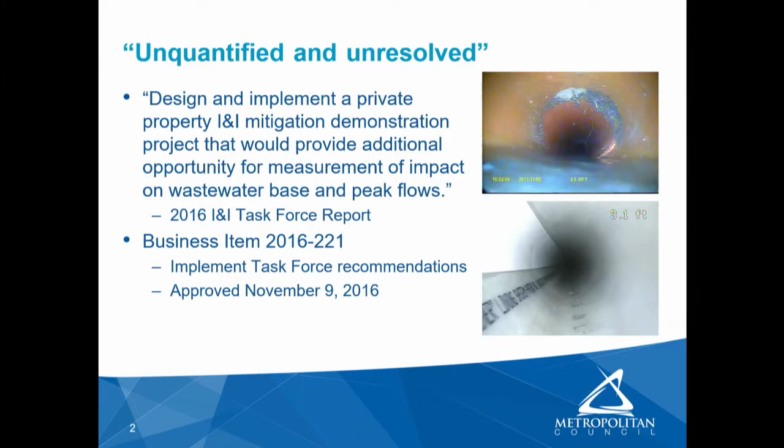So in 2016, the task force report was approved by the council. It included 8 recommendations, and one of those recommendations was for the MCES to design and implement a private property I&I mitigation demonstration project that would provide additional opportunity for measurement of impact on wastewater base and peak flows. And so here today is our proposed demonstration project. I'll turn it over to Marcus. Thank you, Kyle.

As Kyle said, we've been working on this for a while. I think we came here back in 2016, and in January, Janine and I did an information item to the effect that we were going to be working on this as well. And again, this grant is to support funding of a project that demonstrates a reproducible approach to address I&I, which adds to the current knowledge base that working on I&I is good for the sustainability of the system. So the goals themselves are really at the high level.

We're looking to demonstrate the effectiveness of the techniques used for I&I mitigation. Generally, we know it's close the sources of I&I, more or less, but we want to prove locally that it works, have a local project to work from, and it's something that the task force asked us to do. And one of the major drivers of this is that other regional communities would be able to use this demonstration project, take the results, and use that in their own system, adding to the value of those dollars throughout the communities.

What we would ideally look for is something like this. For any given rain amount, you see before and after how much gets into the wastewater system. So to do that, typically a community would identify their sources of I&I. They would start monitoring the flows. They do some work, monitor again, evaluate, and this takes a couple of years to do. And so this kind of study we're planning to go through around the end of 2021. So whichever community is selected would have 3 years to do so.

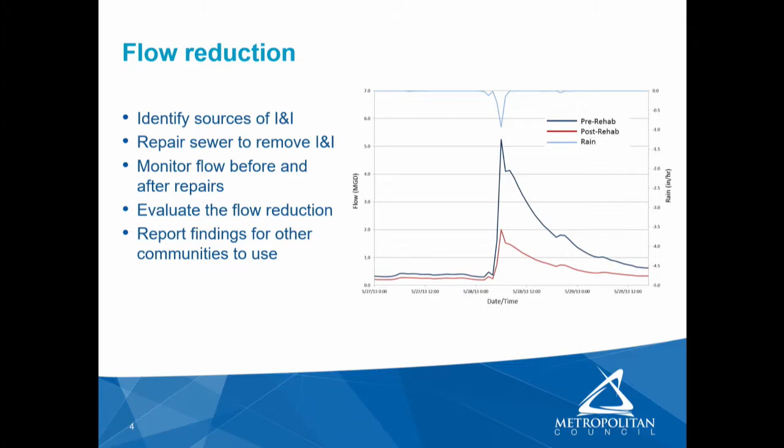And this is one of 2 things that we still have to do from that meeting in January when we had an information item. So basically this and studying the effects of the I&I program are the 2 open items we're still working on. The selection criteria, we went over quite a bit. We wanted to be as objective as we could. We're selecting a community for this. We wanted to make it available to as many communities as possible.

So what's most important is that the proposals that come in, we're going to be looking at them for quality and value. How well is it going to work, and how could this project benefit the other regional communities? On top of that, the ability to complete on schedule. Again, this takes a lot of time for a community to take on. And so 15% of the points are basically saying, can you complete this in 3 years? Do you have the staff and the time and resources to do that?

If you did have a couple of communities that both had 80 out of the 100 points available, there would also be the effectiveness. We know that there's a performance indicator of the age of housing. Housing stock that's older than around 1970 typically has higher rates of I&I. So we've made a priority towards older housing stock. And finally, with financial need, if communities are doing the work in an area of their community that's below their median home value, then we prioritize that as well. So those points are available to all communities. It just comes down to who proposes the best project to get the work done.

What this would include is the flow monitoring itself, the sewer repairs, evaluation, and the reporting over a couple of years. And the guidelines state that at least 50% of the project cost has to be covered by the community. Our estimate is that a project like this would cost over $1 million, and so the grant funding is for $500,000 to one community to do the project.

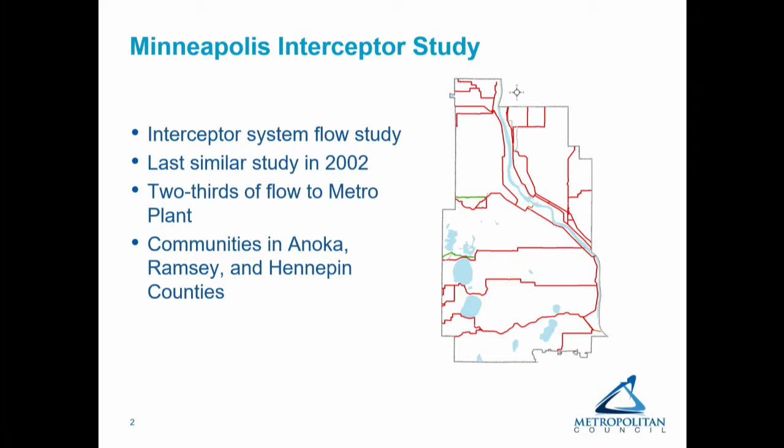All right, thank you. Probably could have put this slide up before. Sorry about that. So as Kyle mentioned, this is an image of our interceptors that are inside the bounds of the city of Minneapolis, reaching out to those 21 communities. The goals of the study, in the big picture, we're looking to reduce the risk of sewer overflow, reducing the potential for it to go to public waters and the risk of it backing up into a building. And we're doing this to increase the reliability of the system. Again, this is the part of the system that quite a bit of flow comes through, and that all goes through St. Paul to the Metro plant.

So the study goals are to identify those areas of high inflow and infiltration. You can kind of hear a theme with the presentations today. And then identify areas with limited sewer capacity. And by doing that, we'll be able to develop some strategies to lower the risk of sewer overflows. Evaluating the alternatives through this study and prioritizing future investments will allow us to make informed decisions and hopefully save quite a few dollars over the period of time that we're talking about.

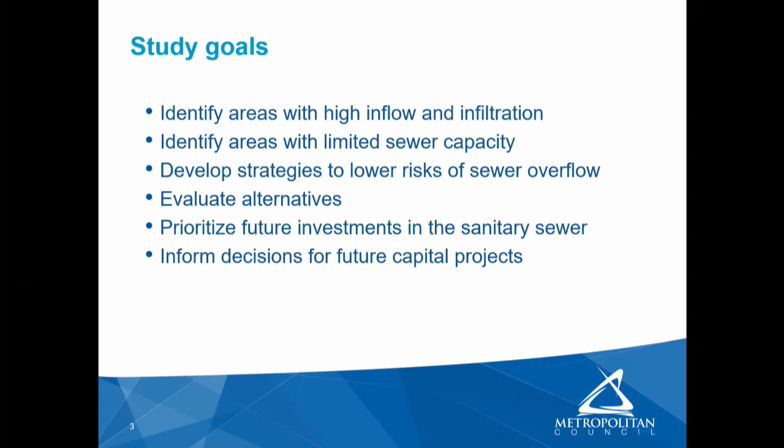I believe that we're looking to project out to around 2050 with sewer flows with this study. In the Thrive lens, the public financial resources will be invested efficiently and effectively to maintain conveyance assets, which protect the region's natural resources. From the side of stewardship and sustainability, I think it's really important that a quantitative analysis of the flow conditions and how the critical interceptors allow for responsive planning to preserve capacity in the region, allow for future growth, and in the long term, just make a more reliable system that we've quantitatively looked at.

We did receive 4 responsive bids, all of which met the MCUB goal commitment, and the selected vendor, based on the evaluation panel led by procurement, offered the highest value proposal for this study. So the proposed action today is that the Metropolitan Council authorize the regional administrator to award and execute the contract for the Minneapolis Interceptor Study, project number 807650, contract 18P047, with HDR Engineering Incorporated in an amount not to exceed $6 million over a 5-year period. And with that, I'll take any questions.

Questions? So remember, Wulff, this is where I thought you were on the agenda when you came in here. I know. We weren't that fast.

So I do have a question. Councilmember Melander. So we had 4 bids. This group was at the lowest? This, I believe, was in the middle, actually. It was based on the value, both the quality and responsiveness of the bid, and then based on what we would get out of the value of the dollars for that. Are you at liberty to say who the other 3 engineering groups are? That's a good question. I'm going to look at Kyle and Janine on that one. I would need to check on that, and could get back with you. Well, that's fine. I'd be curious. Go ahead.

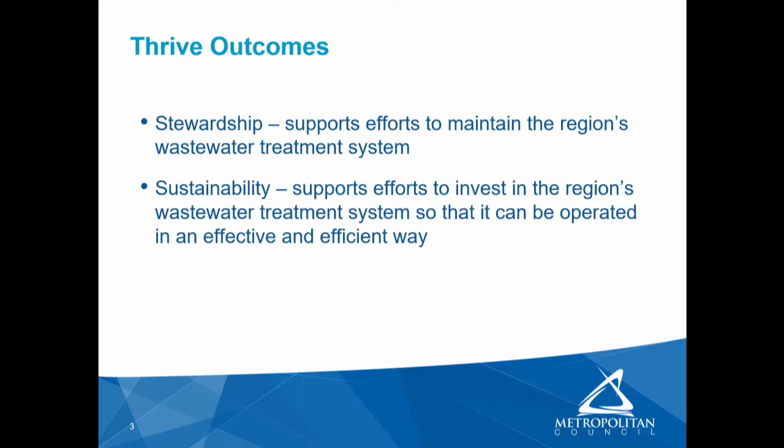This work supports the Thrive outcomes of stewardship and sustainability. The Metro plant needs additional solids treatment capacity to preserve existing wastewater treatment plant infrastructure and to serve regional population growth. By the time the project is constructed, the existing incinerators will be 20 years old. They will need to be taken out of service one at a time for periods of up to 6 to 12 months. We need additional capacity to ride through those periods of renewal.

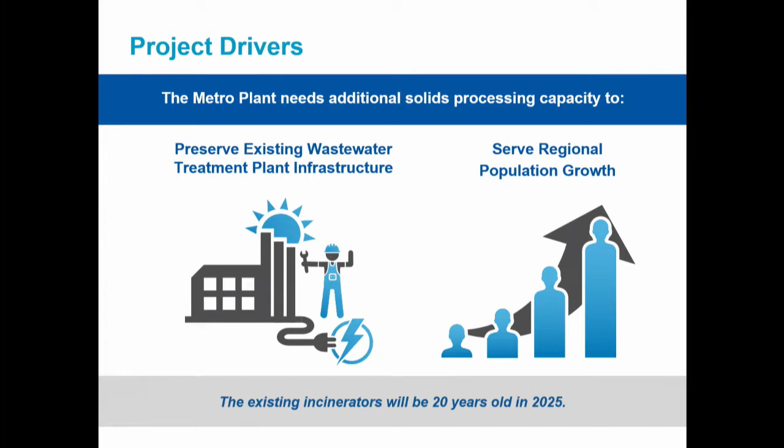The Metro plant service area is anticipated to grow at a rate of approximately 500,000 residents in 30 years. The planning period for this facility plan is through the year 2050. We evaluated a wide range of alternatives against multiple factors, focusing on economic considerations, air quality, energy recovery, and hauling impact. The original list of alternatives was narrowed down to the 4 alternatives shown here, which are the most cost-effective and maximize the life of the existing incinerators. The first alternative adds a 4th incinerator.

The second alternative adds digester facilities to digest a portion of the solids, followed by incineration in the existing incineration units. The third alternative adds dryer facilities for the production of a biosolids product that can be sold as a fertilizer. This is similar to what we do at our Blue Lake plant. The fourth alternative adds digester and land application facilities for the production of biosolids that can be used as a soil amendment. This is similar to what we do at our Empire wastewater treatment plant.

Due to the size of the Metro plant, adding a 4th incinerator costs 50% less than the lowest cost digestion alternative to construct, operate, and maintain. The fourth incinerator also provides for continuity with existing facility operating requirements, and it maximizes our investment in the existing incinerators.

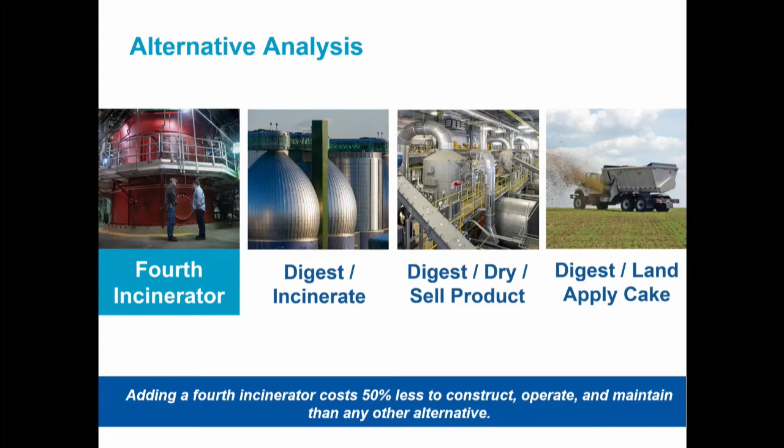Our evaluation included the sustainability components listed here, comparisons for air emissions, energy recovery, greenhouse gas emissions, and reuse potential. The fourth incinerator has the lowest air emissions of any alternative. The fourth incinerator also has excellent energy recovery capabilities. All alternatives have comparable greenhouse gas emissions, and this is because greenhouse gas emissions from wastewater treatment plants really aren't a factor in the Twin Cities area. All alternatives have comparable nutrient recovery in terms of phosphorus.

The Metro plant ash is high in phosphorus and micronutrients. It has potential for beneficial reuse as a phosphorus fertilizer. MCES is currently exploring this use with the University of Minnesota. The University of Minnesota is conducting a 3-year crop study. We are 2 years into that study, and the results look very promising.

The recommended plan is to construct a fourth incinerator, followed by renewal of existing incineration facilities. The total estimated project cost is $180 million. This is the concept drawing showing the new incinerator in a small 22,000 square foot building extension of the existing solids management building at Metro. The addition is a bump out that parallels the existing 3 incinerators.

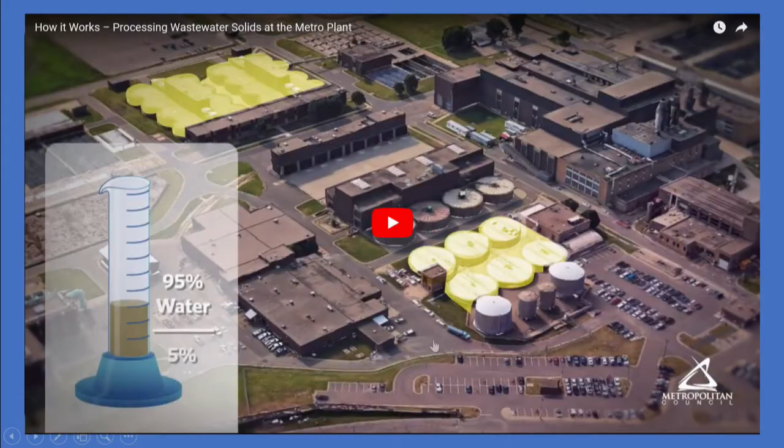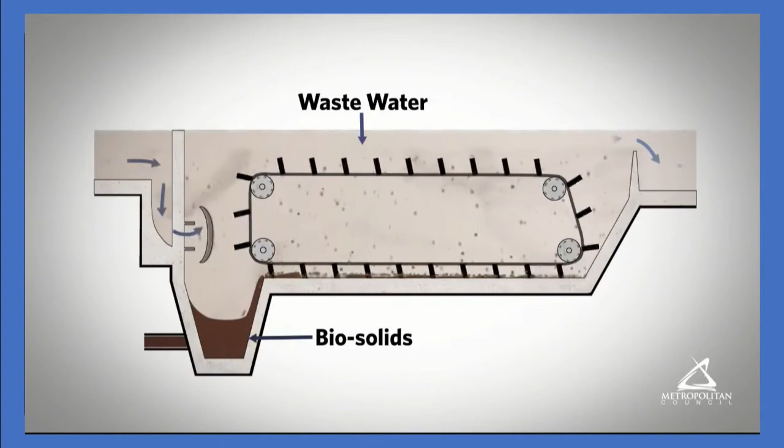Wastewater treatment produces sludge, also known as biosolids, that treatment plants must process separately. Biosolids are a renewable, carbon-based fuel source that burns similar to wood or coal. Challenges we face in treating biosolids include: 1. Removing liquids to reduce volume. This makes handling easier and more efficient. 2. Stabilization to remove disease-causing bacteria. This is done using heat. And 3. Recovering energy to generate heat and electricity. This greatly reduces our plant's energy costs.

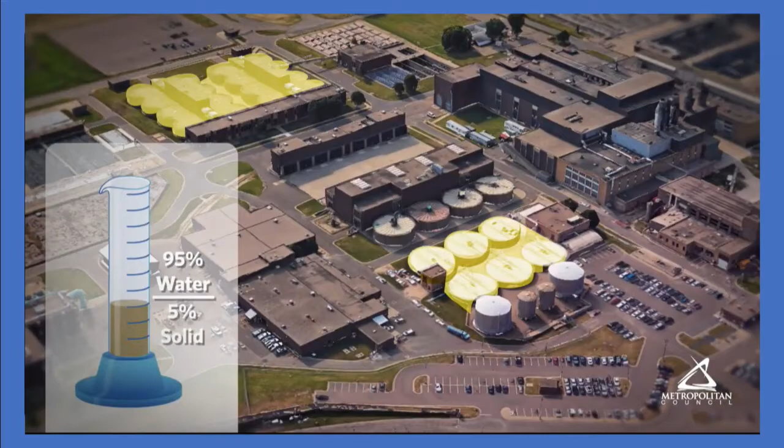At the Metro plant, we collect biosolids from the bottom of settling tanks that span 18 acres. That's the size of about 13 football fields. Initially, the settled biosolids are about 5% solids and 95% liquids by weight. Then, gravity thickeners and flotation thickeners begin removing water from the biosolids. In our solids management building, centrifuges further concentrate the biosolids. At this point, we have a product called cake that is suitable for incineration. To learn more, please visit our project website or contact our project team.

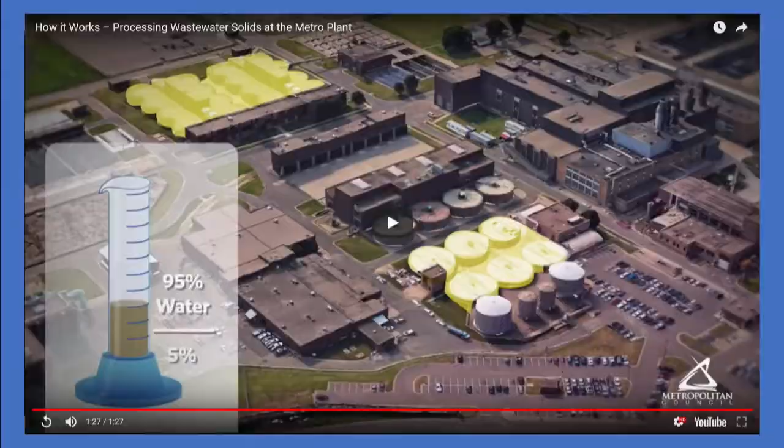Cool. Ironic name, cake.

Hopefully we get this back. Madam Chair, I have a few more slides. Greg, can you please bring back up the PowerPoint?

Apparently not. We have it here in front of us if you want to keep going. Sure. The next slide is the proposed project schedule. We propose to hold a public hearing for this facility plan. Is it August 30th of this year?

Pending council adoption of the facility plan, we would initiate design early next year in 2019. Construction of the fourth incinerator would occur 2021 through 2024. Then the existing incinerators would be renewed 2025 through 2027. And if I can interrupt, then this should hold us until 2050. Is that what I heard you say earlier? Madam Chair, for planning purposes, that was the capacity requirement for the alternatives.

Okay. And our experience, Madam Chair, is that we're doing renewals about every 10 years, smaller renewals, and we're saving up this larger one for that 20-year period. So maybe every 10 years. Sounds good.

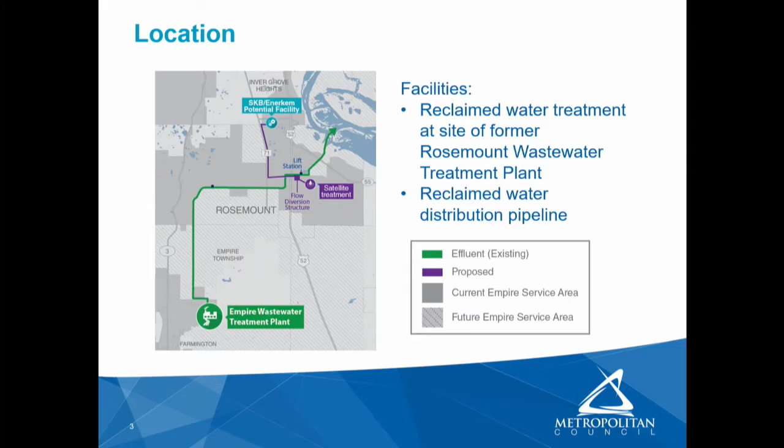The cost estimate for MCES's facilities is approximately $27.7 million. And that includes construction costs with contingency, engineering and administrative costs, inflation, land acquisition, and permitting. And those costs would be recovered from the user minus any regional cost share that is deemed to be appropriate.

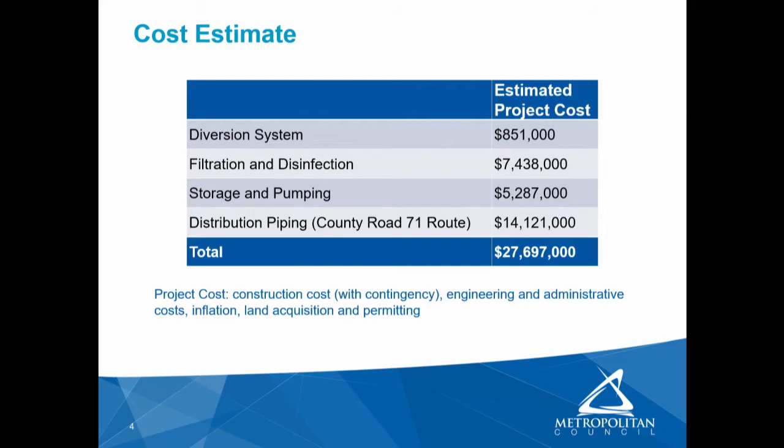The proposed schedule for the project is we're right now in that June timeframe, considering adoption of the facility plan. If adopted, the staff would submit that to the MPCA, as I mentioned, in July. The schedule for final design, construction and commissioning is to be determined based on decision making by SKB and Enerkem. And what we have heard from them recently is that they're projecting needing reclaimed water delivery in the late 2020 or 2021 timeframe.

We received 10 formal comments: one from an energy utility, one from a Rosemount Utility Commission member, 2 from local businesses, 2 from local residents, 3 from union representatives, and 1 from the mayor of Inver Grove Heights. Basically, the comments fell in about 4 areas. 2 of them noted that coordination with local businesses and utilities would be needed during the construction process.